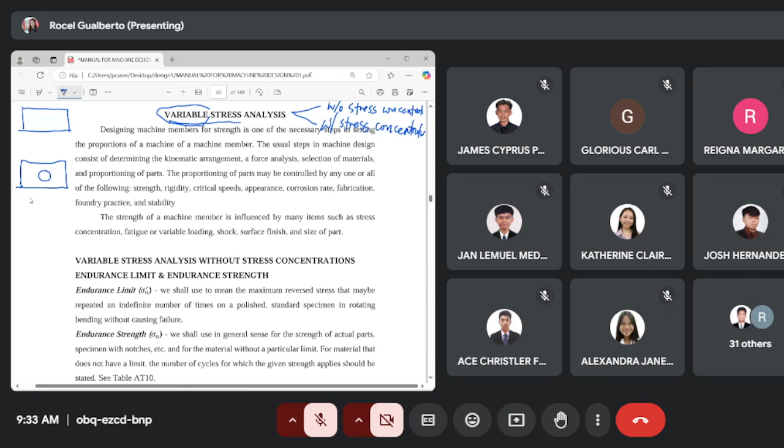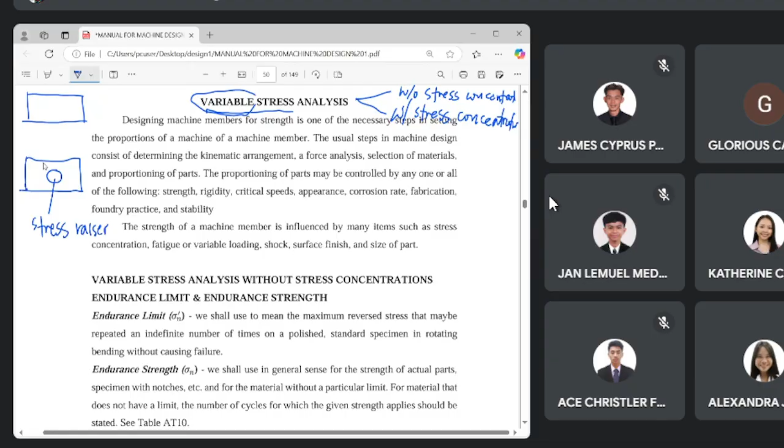Kailangan yung likuran may dadaanan ng hangin kasi plastic siya, so mainit sa katawan, kaya nilalagyan na ng butas. Okay, but along with that design, along with that function, is of course the disadvantage that this serves as a stress raiser. Ang tawag dyan, it's a stress raiser, meaning the stresses are concentrated on this area. Nakakoncentrate dyan yung stress natin, so making that area now the weakest. So ibig sabihin, if failure would occur, most likely dun siya masisira.

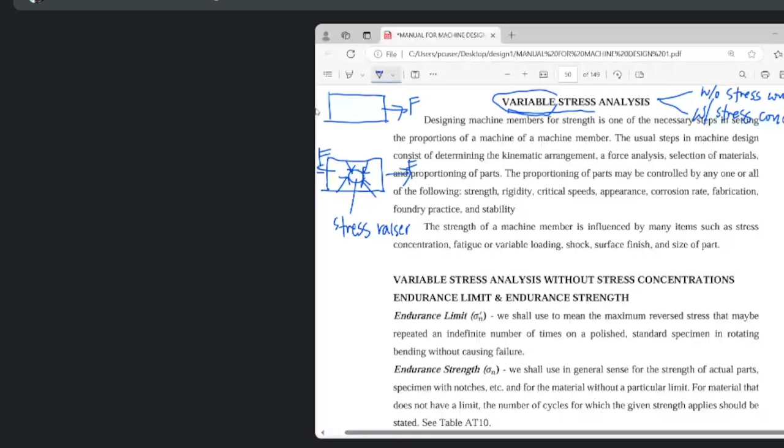Halimbawa, nilagyan mo po ito ng tensile force, hinila mo po siya. Versus the other one, nilagyan ko rin po ito ng tensile force, the same amount. Alin ba yung unang masisira sa dalawa? Of course, we are sure na ito yung unang masisira, dahil maliit yung area dito, dito lang siya i-break, diba, dito sa parte na yun. So ito lang yung pupunitin para masira siya. Unlike dito, mahaba siya, malaki, so very solid yung area. Kaya kapag may ganyan, yan yung tinatawag natin as the stress raiser. Yan yung papatak doon sa with stress concentration, at ito namang una, yan naman yung without the stress concentration.

So the machine member does not occur with any surface discontinuity or stress raiser. Dalawa yung ating i-discuss dito, yung meron at saka yung walang stress raiser. And if you are to compare itong dalawa, of course it would be more complicated to decide yung may stress raiser kasi i-account mo yan. Ano ba yung magiging effect niya? We have to ensure na kahit siya ay may ganyan, may stress raiser siya, ay magiging safe pa rin siyang gamitin, with the design load.

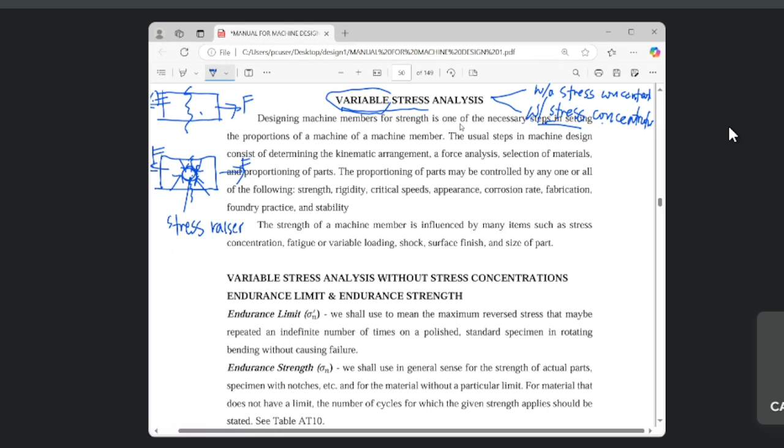So ito po yung dalawang gagawin natin na analysis with and without the stress concentration. Now, paano po ba natin i-design yung mga ganyan na member? Sa ganyan na member, meron tayong mga additional na stresses na gagamitin, or additional properties na gagamitin. We have what we call the endurance limit and the endurance strength. Kung dati ang ginagamit lang natin is sigma U for the ultimate strength and sigma Y for the yield strength, dito may gagamitin tayong sigma N and sigma prime N. Sigma N is called the endurance strength, at yan naman po ay sa table din natin makukuha.

And there are cases na isinosolve din naman siya, you can solve for the value of your sigma N. Sigma prime N is endurance limit. So they are somewhat the same, pero magkaiba in a sense that ito yung limit and yung isa is the strength itself. Etong dalawa, ito yung dagdag kapag variable stress analysis, and this is definitely based on the life of the material. Parang yung tao din, meron siyang buhay, so ito din naman ang tinatawag natin as the useful life of the material. Yun po yung nagde-define ng ating endurance strength and endurance limit.

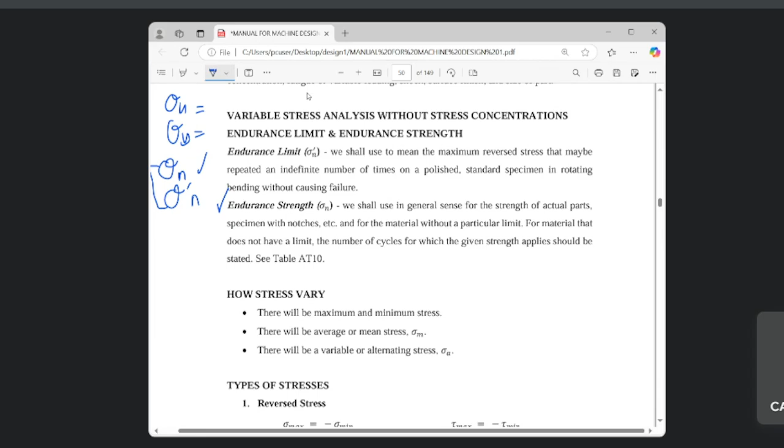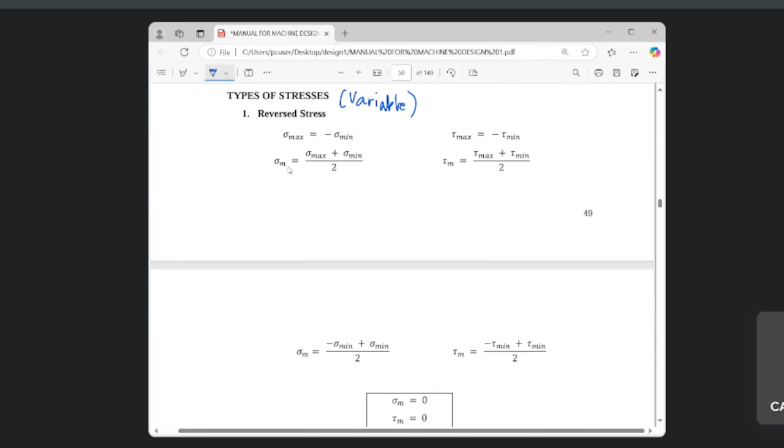Now, ano po yung mga types ng variable stresses? These are the types of the variable stresses. We have first the reverse stress, ang pangalawa po is the repeated stress, and yung pangatlo naman po is the fluctuating stress. So ano po yung reverse stress? Okay, you look at the reverse stress.

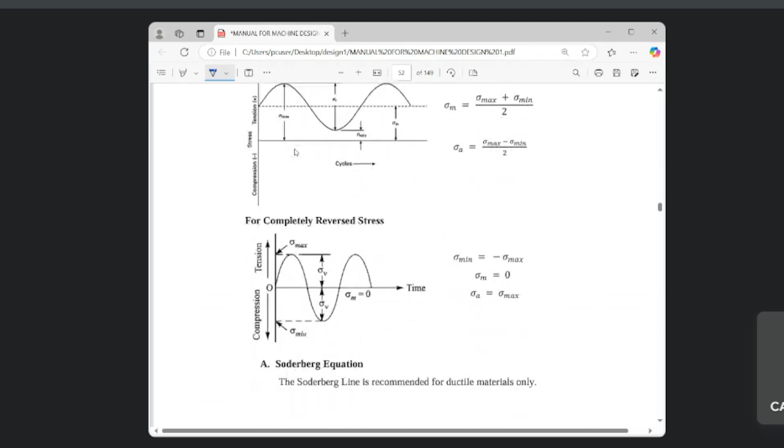Dari mo na po yung ating kuhanin, reverse stress. Ang property pag reverse stress, this is the maximum value of sigma, ito lang ang minimum value ng stress din. And we say, the minimum value ng stress would be negative sigma maximum. Kumbaga, parang parehas yung value, ang isa lang ay negative. Halimbawa, maximum stress ay 10 KSI, ang minimum is negative 10 KSI. So ganun yung ibig sabihin. So yan po yung property kapag reverse stress, maximum equals, minimum is equal to negative sigma maximum.

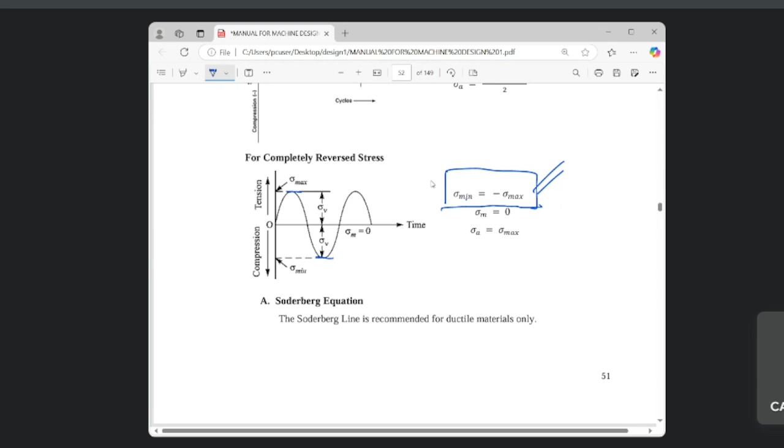At saka yung isa naman, ito naman yung repeated stress. Pag repeated stress naman, when we say repeated, it's either sigma maximum is equal to 0, o kaya naman sigma minimum is equal to 0. Okay, may alin sa dalawa naka-equate sa 0.

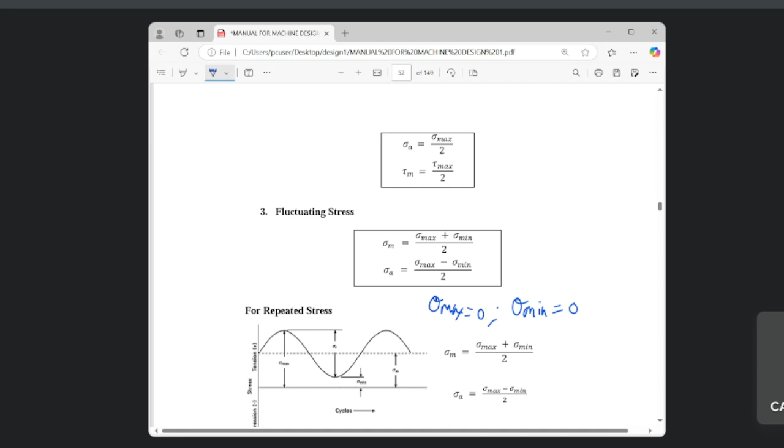Now for these types of stresses, we start with the reverse stress. As we said earlier, the maximum value and minimum value are the same, only the sign differs. So sigma maximum equals negative sigma minimum.

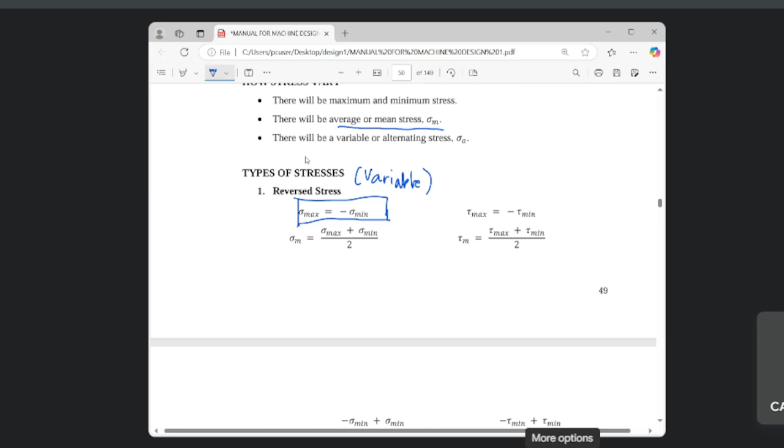And we have what we call sigma m. What is sigma m? It is the mean or average stress. Since the force we apply varies, what we need to get are the maximum and minimum values - what will be our basis for design: the maximum, the minimum, or the average?

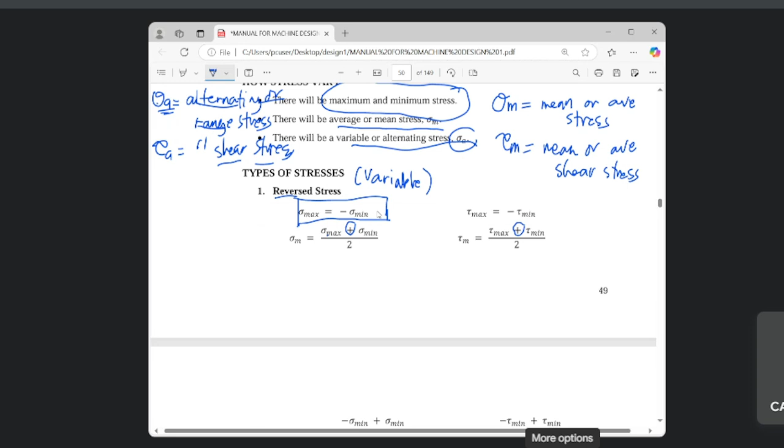Now from the property of a reverse stress, we said the maximum equals negative sigma minimum. So we substitute that in place of sigma maximum: negative sigma minimum plus sigma minimum, which equals 0. So this is 0 over 2, therefore sigma m equals 0.

That's for reverse stress. Likewise for tau, it's the same: tau m would be tau max plus tau minimum divided by 2, and your tau max equals negative tau minimum. So we substitute negative tau minimum plus tau minimum, which again equals 0 over 2, therefore tau m equals 0.

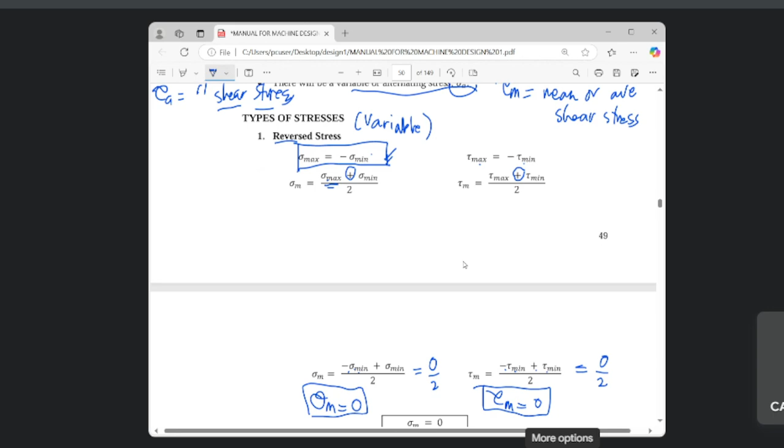That's the property when it's a reverse stress - remember this: for reverse stress, sigma m equals 0 or tau m equals 0. And what about sigma A? Again, sigma A is your alternating or range stress.

Okay, so the equation would be sigma max minus sigma minimum all over 2. Likewise, for tau A, it's the same thing: tau max minus tau minimum divided by 2.

Now, for sigma max, that is equal to negative sigma minimum. That is the characteristic when it's reverse. So what happens now? Negative sigma minimum minus sigma minimum equals negative 2 sigma minimum. Divided by 2, you cancel out the 2, and that becomes negative sigma minimum. And this negative sigma minimum is equal to your sigma maximum. So therefore, your sigma A is equal to sigma max, the maximum stress.

On the other side, for tau, it's the same. Tau A is tau max minus tau min all over 2. And your tau max is equal to negative tau min when reversed. So minus tau min becomes negative 2 tau minimum divided by 2. Cancel out the 2, you come up with negative tau min. So therefore, tau A is equal to tau max. The value is the same, only the minimum is negative.

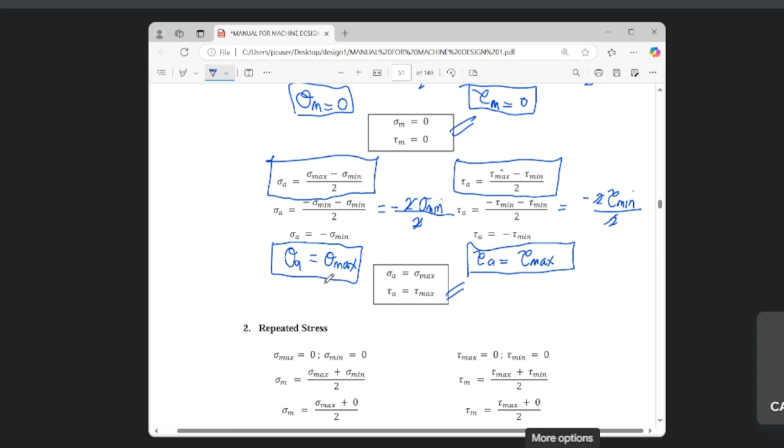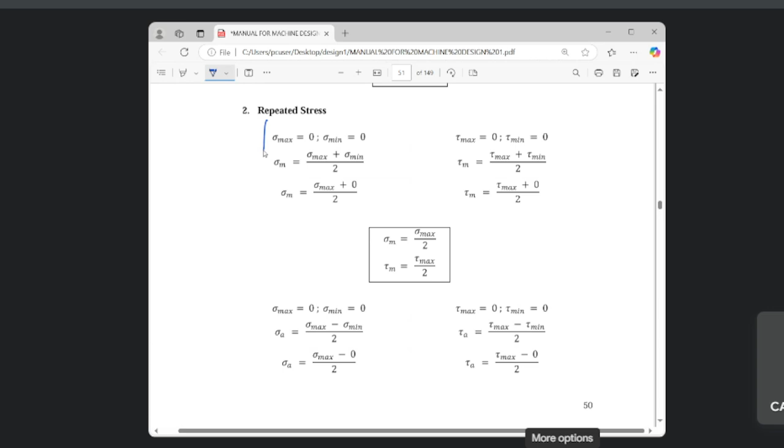Now we go to the repeated stress. When it's repeated stress, we also get the sigma m and sigma a. Earlier we said that for repeated stress, either the maximum value of the stress is 0, or the minimum is 0. One of the two is 0. So for example, let's set sigma minimum equal to 0, and tau minimum equal to 0.

If this is what we set as equal to 0, what happens to our equation? From the general equation of the mean or average stress, it's the maximum plus minimum divided by 2. So for sigma m, it's sigma max plus sigma min divided by 2. For tau, it will be tau max plus tau min divided by 2. And we set sigma minimum equal to 0, so this part becomes 0. And your tau min is also equal to 0, so that becomes sigma max plus 0, and here it becomes tau max plus 0 divided by 2. So this can be further simplified.

Sigma max all over 2. And for this one, tau max divided by 2. This is valid only if you have a repeated stress.

So that's the property for repeated stress. Earlier, what was sigma m and tau m for reverse? It's equal to 0. But for repeated, it would be equal to the maximum divided by 2.

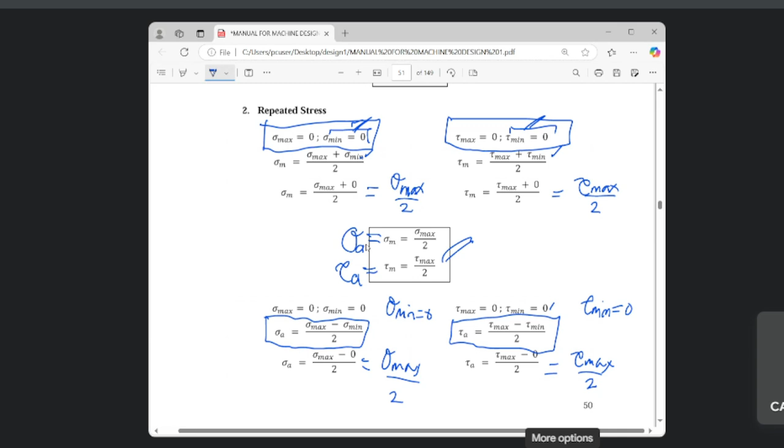And then the fluctuating type will make use of the general equation. You just obtain the maximum and the minimum values divided by 2. Same thing with sigma A, it's the difference divided by 2.

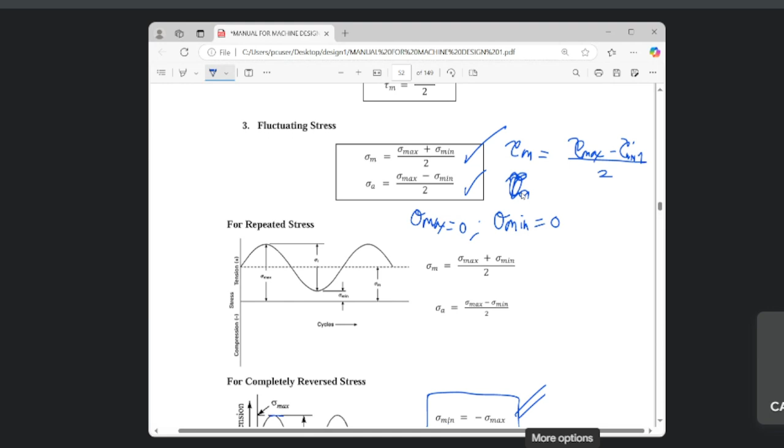If you wish to know tau m, then that would be tau max plus tau minimum divided by 2. And your tau A equal to tau max plus minus tau minimum divided by 2. Alternating is a minus, ito naman po plus for the mean or the average.

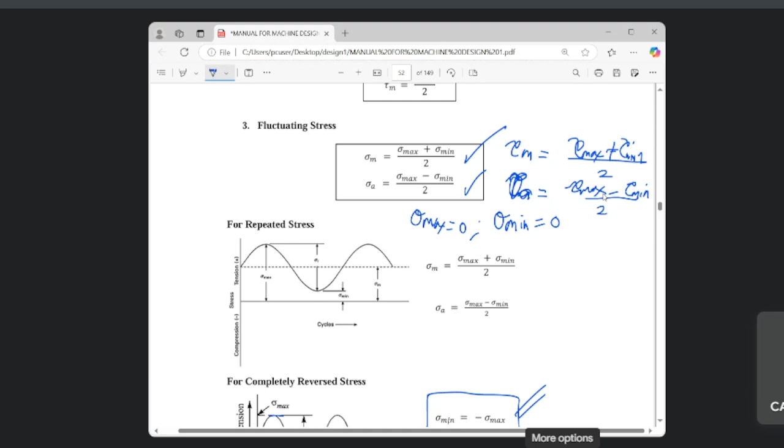Tanong po? May tanong? Again, kapag variable stress po, ang kukunin lang natin are maximum and minimum values. May question before I continue? Okay, wala, so let me continue now.

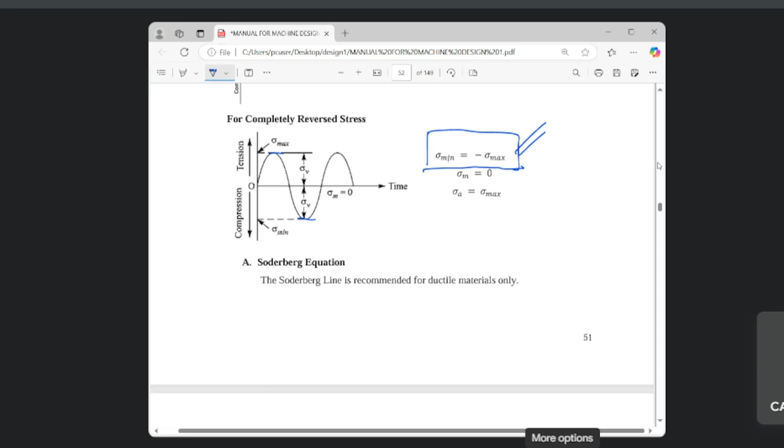Now, ano po yung gagamitin nating equation to design these members? Again, these are your machine members with variable stresses. Ang kailangan natin dito is what we call the Soderberg equation, and ang isa naman ay the Goodman equation.

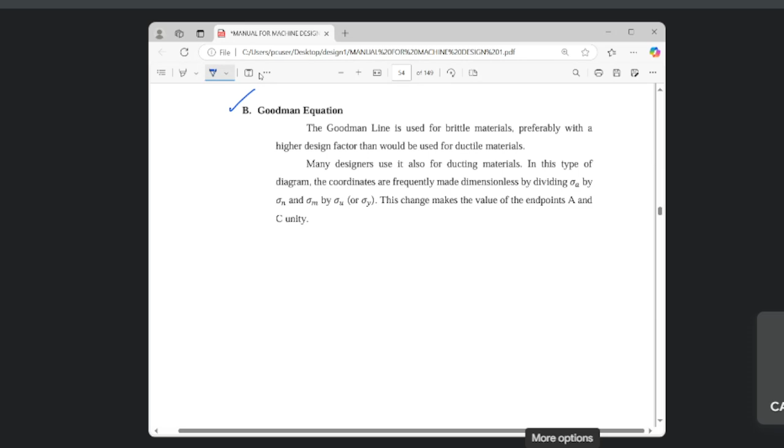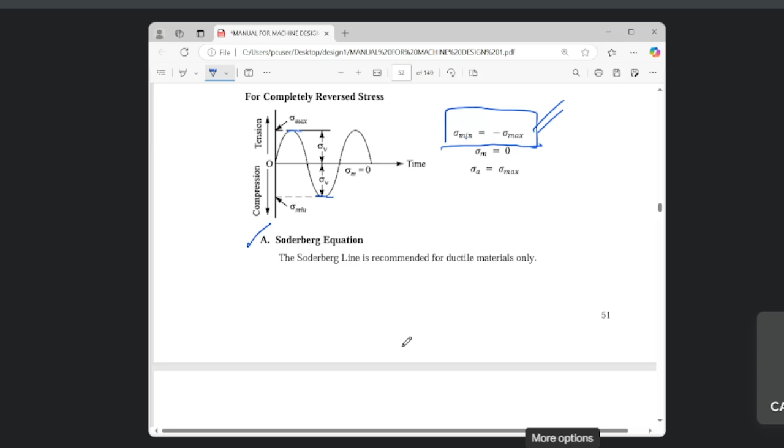Hindi na po natin gagamitin dito yung ating design stresses, di ba? Ang design stress natin is sigma U over Fs or sigma Y divided by the factor of safety. Hindi muna natin siya gagamitin, hindi sa problem na ito, dito sa variable stress analysis. Kundi, ang gagawin natin, ang kukunin natin is the Goodman and the Soderberg equation, which will define ang gagawin nating analysis on the variable stresses.

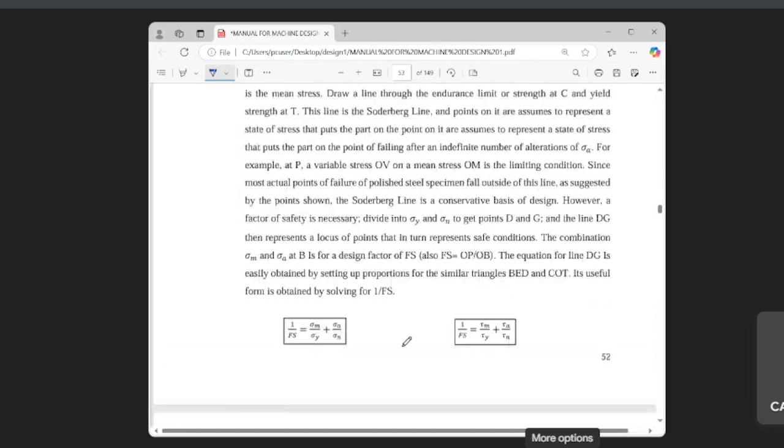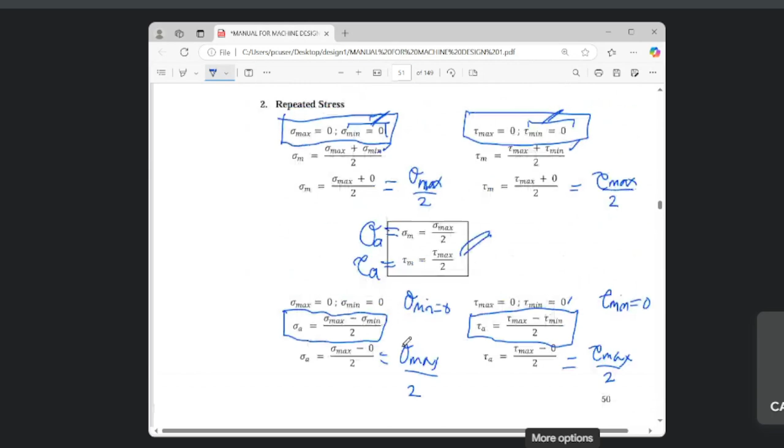So, ano po yung ginagamit natin as the two equations? Whenever we have a variable stress analysis, pipili lang tayo doon sa ating analysis kanina, yung with stress concentration at ang pangalawa ay yung without stress concentration. Yun lang ang pamimilian natin.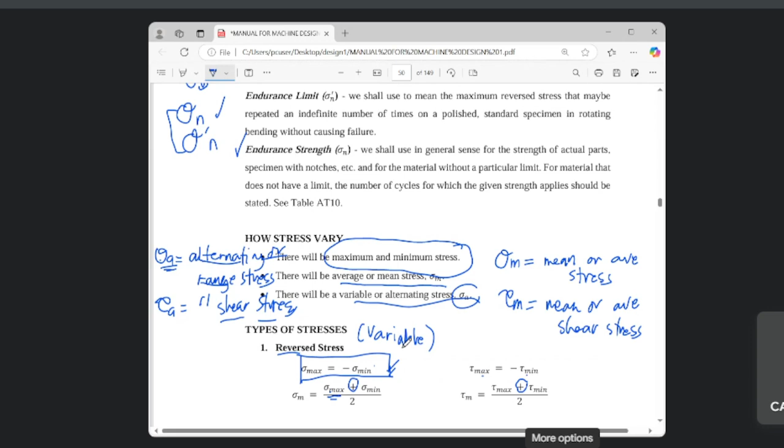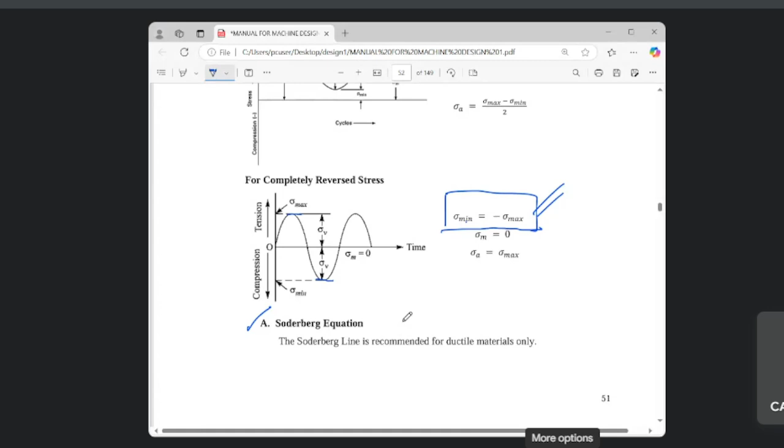Okay, so I'm done with the mean or the average stress, as with the range or alternating stress. So we go with the Soderberg equation and the Goodman equation. Whenever we have a variable stress, yung dalawa ang gagamitin natin. So alin yung Soderberg equation?

Ang Soderberg is simply 1 over Fs equal to sigma m over sigma y plus sigma A over sigma N. And then the other one, 1 over Fs is equal to sigma M over sigma U plus sigma A all over sigma N.

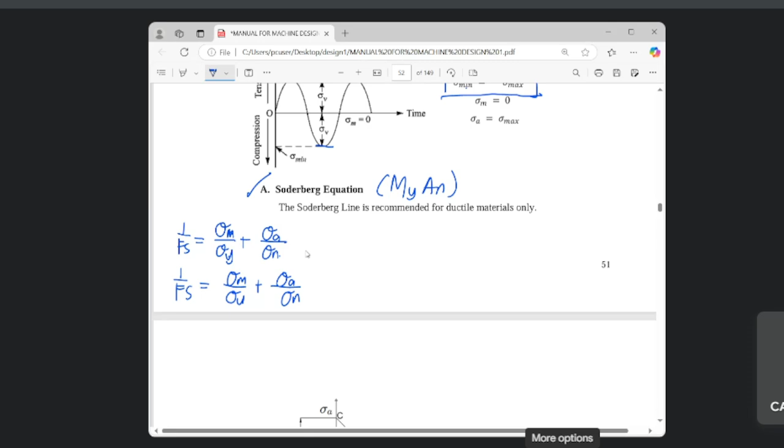Ang tawag din sa una, ang Soderberg equation, yan yung Mayan. Bakit Mayan? Look at this: M-Y-A-N, kaya Mayan ang tawag diyan. Doon naman sa Goodman, ang tawag naman diyan is MuAn.

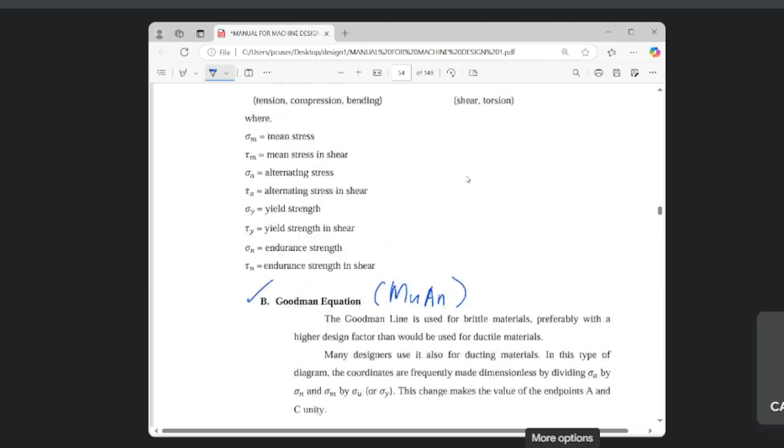Ano naman yung MuAn? Sigma M, sigma U, sigma A over sigma N. Yan naman yung MuAn. So, ari ay Mayan, ari po ay MuAn. We set these codes para madali natin maisulat yung equation.

Yung Soderberg line, it has yung form in terms of the sigma, meron din siya sa tau: 1 over Fs, gagawin mo lang tau lahat ng sigma — tau m over tau y plus tau a over tau n. And here, 1 over Fs equal to tau m over tau u plus tau A over tau N. Yan yung mga equations natin na gagamitin.

So, the first one is your Soderberg equation. Ay, at ito naman isa, based on the ultimate, that would be the Goodman. So Mayan for the Soderberg, MuAn for the Goodman equation.

So, ano yung pinagkaiba nitong dalawa, ni Soderberg at saka ni Goodman equation? That is basically on the type of material, whether it is ductile o kaya ay brittle. Yun yung difference between the two. So we have Soderberg and the Goodman equation.

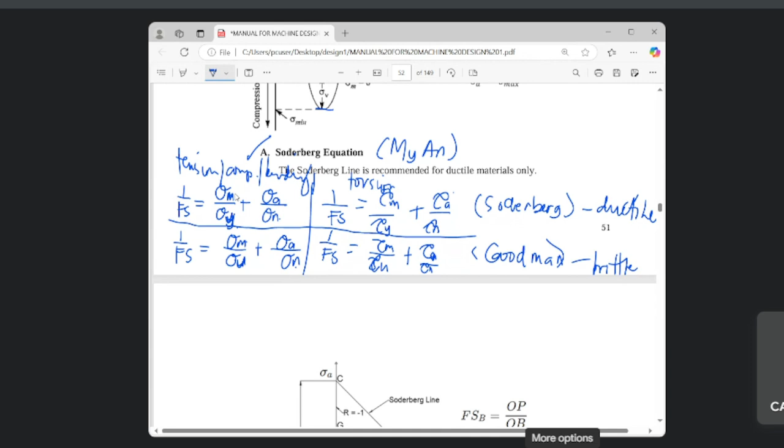Okay, so yan po yung ginagamit natin na equations. Again, these are valid only kapag variable stress analysis.

So, yung sigma y po, this are readily available sa value doon sa ating table. Yung sigma y, same thing with the value of your sigma. We have there the mean. Sigma m is the mean, and sigma a is the alternating or the range stress.

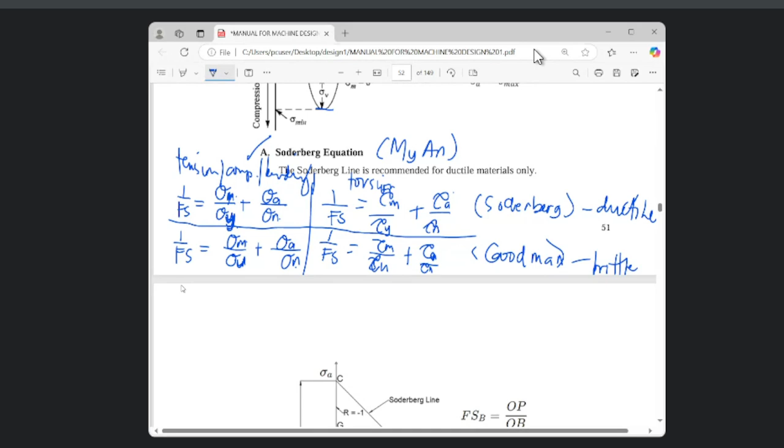Saan naman po yung nabanggit ko kanina, yung sigma m at saka yung sigma a. And then last po naman is your sigma n. Again, your sigma n, we call this the endurance strength.

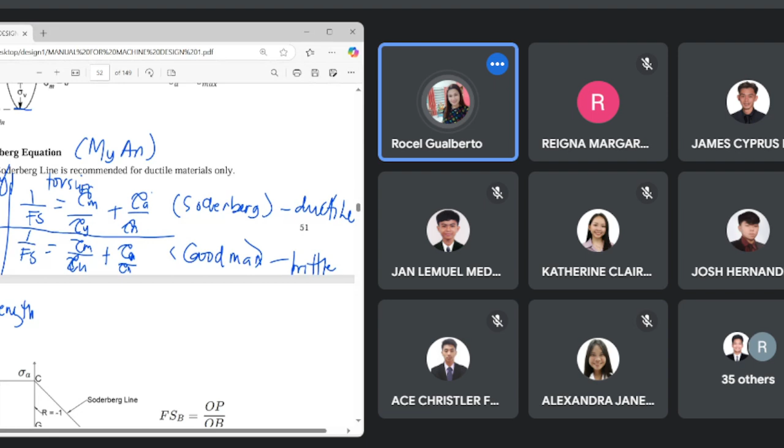And this endurance strength, okay, it is dependent on what we call life. Yung buhay ng material po, okay, there are two: we have what we call indefinite life, at ang isa naman po ay definite life.

Definite life, ibig sabihin, meron siyang hangganan, nakadefine yung kanyang hangganan. Halimbawa po, you have there yung rotating wheels po natin. Okay, so you have there yung definite life, nakadefine lang ilang ikot, kumbaga ilang ikot mo lang siya magagamit. Otherwise, masisira na siya. So yun po yung tinatawag natin as definite life.

At ang indefinite life naman po, okay, that could be useful. Yung machine po na yun would be very useful na pwede mo siyang magamit sa loob ng maraming taon. So yun po yung ibig sabihin ng definite at indefinite life. Again, it's the endurance strength who has—endurance strength is dependent on the life of the machine member.

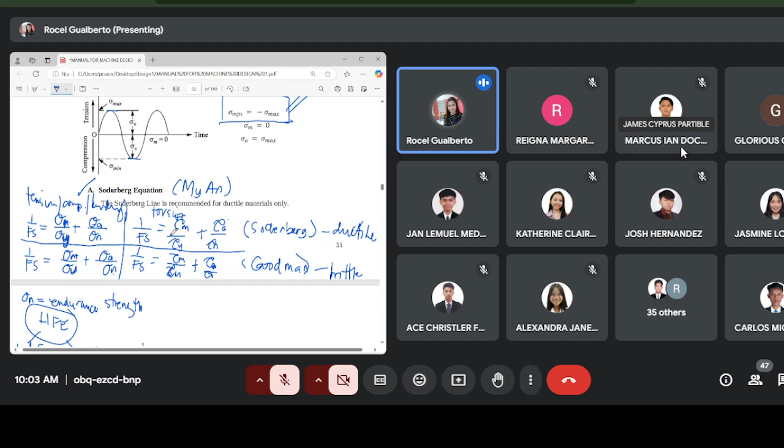Okay, ano po yung kasunod nito? So, again, dalawa lang yung equation na sasauluhin: Soderberg and Goodman. Yung sigma or tau yung gagamitin, depende po sa type ng loading. Tension, compression, bending, you use sigma. Torsion, we use tau.